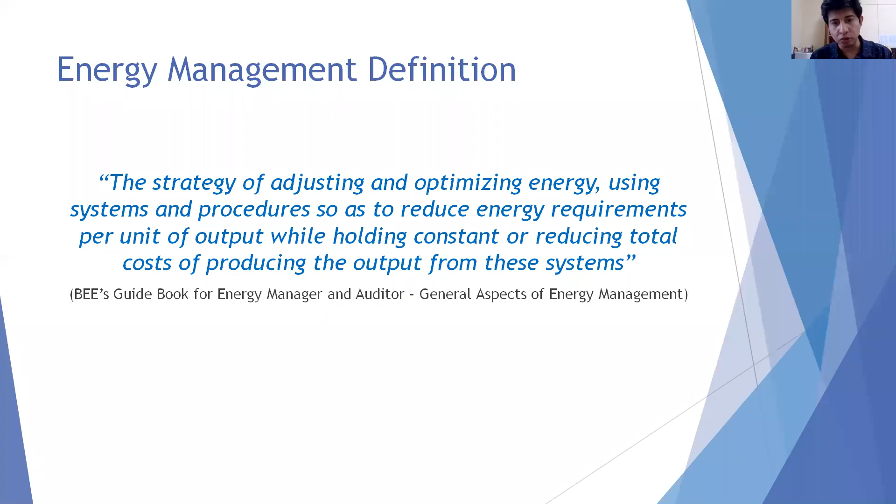As we move on to the next slide, the objective of energy management is to achieve and maintain optimum energy procurement and utilization throughout the organization. And ultimately we have to minimize energy cost without affecting the production and quality, to reduce energy wastage and to minimize the environmental effect by decreasing the CO2 emissions.

Now, why we need energy audit? Energy audit is a technique for addressing the energy management procedures. So basically, there are three key factors which play a major role in the overall production cost of any product or service. The three factors are energy, labor, and materials. And as we see in our industries, the major factor is energy, which claims around 30 to 50% of the overall production cost of the goods. So we target this area, that is energy management.

Our primary objective of energy audit is to determine ways to reduce energy consumption per unit of product output or to lower the operating cost. And energy audit provides us a benchmark for reducing the energy consumption in any industry.

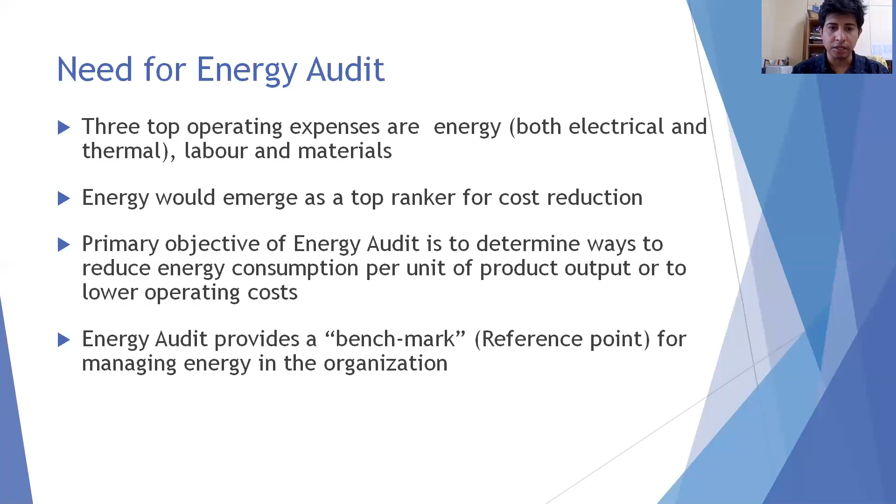Energy audit and its types. If we say what is energy audit, we can define energy audit as a verification, monitoring and analysis of use of energy, including the submission of technical reports containing the recommendations for improving energy efficiency with the cost benefit analysis and an action plan for the implementation of such recommendations in order to achieve energy efficiency in our industries or plants.

The type of energy audit to be performed depends on three factors: function and type of industry and the processes in that industry, depth to which final audit is needed, and potential magnitude of cost reduction desired. Thus, energy audit can be classified into the following types: preliminary audit, targeted energy audit, and detailed audit.

Preliminary energy audit is relatively a quick process and takes around 2 to 5 days or maybe a week, depending upon the procedure and size of the plant or industry, wherein we establish energy consumption in the organization and a scope of savings. After which we identify the most likely and the easiest areas for attention, which are directly targetable to take the actions for energy conservation, and we identify those areas for the improvements and set a reference point for saving the energy.

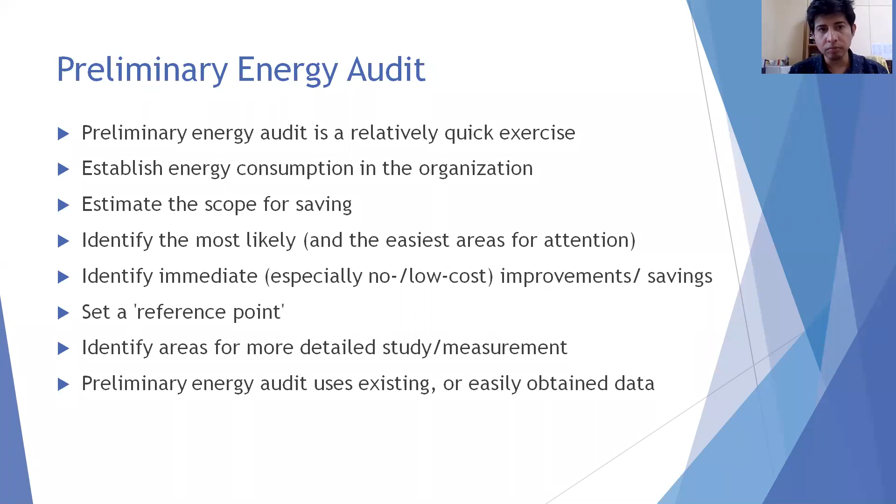Targeted energy audit. Targeted energy audit is basically an advanced part of preliminary energy audit, wherein we take the data and we do the detailed analysis on specified target projects. Like after the preliminary audit, some plant says that we only target the boiler portion, so we carry out the detailed energy study of the boiler part. Or if someone says that we only want to target the HVAC portion, so in targeted energy audit we only go by the specific zone-wise analysis of energy consumption.

Further, as an example, an organization may target its lighting system or a boiler system or a steam system or compressed air system, with a view of effecting energy savings. So targeted audits therefore involve detailed surveys of the target subject and analysis of energy flows and costs associated with the targets.

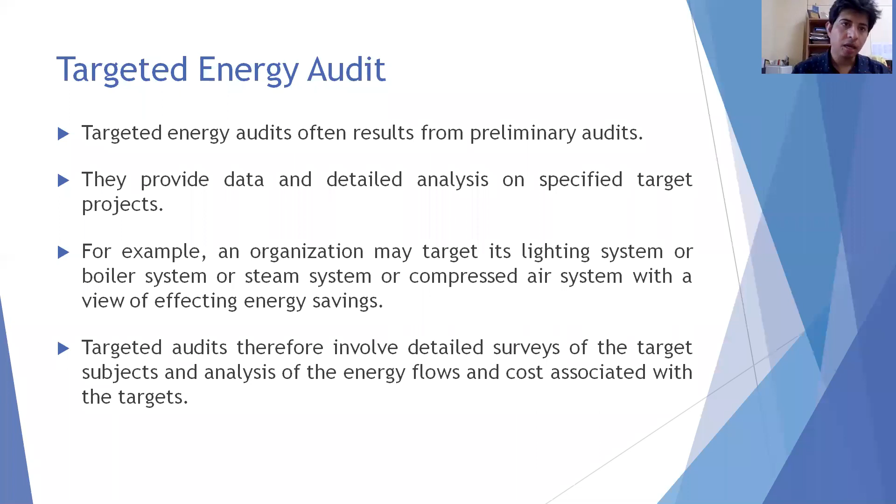Now the third type, which is the more exhaustive type of energy audit, wherein we carry out the detailed analysis and measurements ranging from a few weeks to a month, and we evaluate all major energy consuming systems and equipment, and offer the most accurate estimate of energy savings and cost. Here we do proper planning of all the manpower, and we select the instruments which are required to carry out the detailed energy audit, wherein we do measurements and take values, and then we further find out the scope for energy savings across all the zones of the plant.

While doing the detailed energy audit, we consider the interactive effects. Effect of one zone on another zone, or one process on another process. We also take that into account while calculating the energy savings or energy consumption in any equipment.

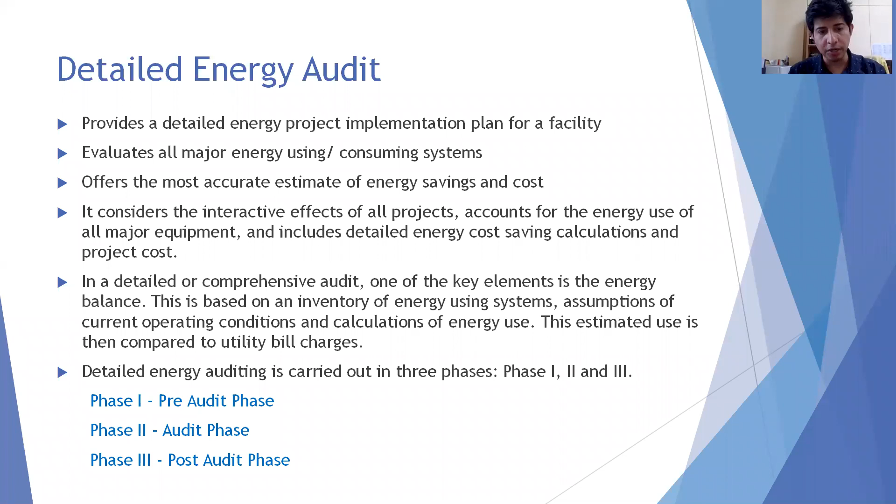The detailed energy audit is carried out in three phases: the pre-audit phase, the audit phase, and the post-audit phase. In the pre-audit phase, which is step one... Actually, there is a 10-step methodology to carry out the detailed energy audit. Step one and step two are related to the pre-audit phase.

In step one, we do the proper planning and organize things, wherein we make an energy audit team and choose the energy audit instruments which are required for carrying out the energy audit, and we plan for the number of days during which we carry out the energy audit in any industry.

And then we conduct a walkthrough audit, wherein we visit the plant for one or two days, discuss with the plant managers, shop floor people and top managers, collect the macro level data from them, go through the overall process of the factory, and become aware of the basic functionality of the processes carried out in the factory.

Then we plan for the next stage, that is, conducting a brief meeting and structured interview with all the divisional heads and persons concerned. In this stage, we prepare questionnaires to collect data from different divisions, zones or sub-processes running in the factory, and we build up cooperation for the whole period, since we need constant support from the management to carry out this energy audit.

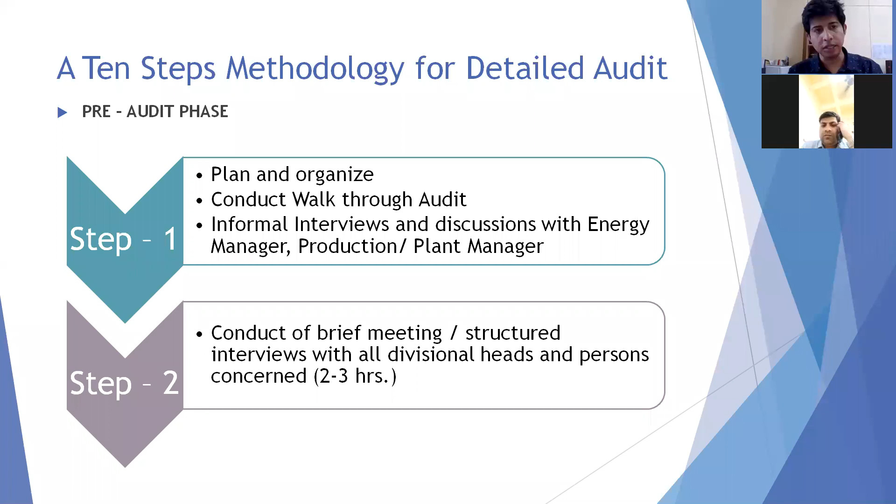The next stage starts with the third step, which is the audit phase, wherein we collect the primary data for each process, that is, the historical data and baseline parameters, and prepare a process flow chart for the whole facility. Then all service utility system diagrams are developed, such as the single line diagram, water distribution diagram, steam consumption diagram, and compressed air distribution diagram. Then we collect the design operating data along with the schedule of operations in the factory.

Along with this, we also collect electricity bills. Sometimes we collect the last one year of data, and if the process is too critical, we collect the last three years of energy bills, and the log sheets maintained in the plant.

In the fourth step, we conduct a detailed survey and measurements of all the equipment and sub-processes running in the facility. We use dedicated instruments such as a power analyzer, flue gas analyzer, tachometer, and anemometer, and for thermography, a thermography device. While carrying out detailed measurements, we do a motor survey, insulation survey and lighting survey. Along with that, we do detailed collection of various energy-affecting parameters.

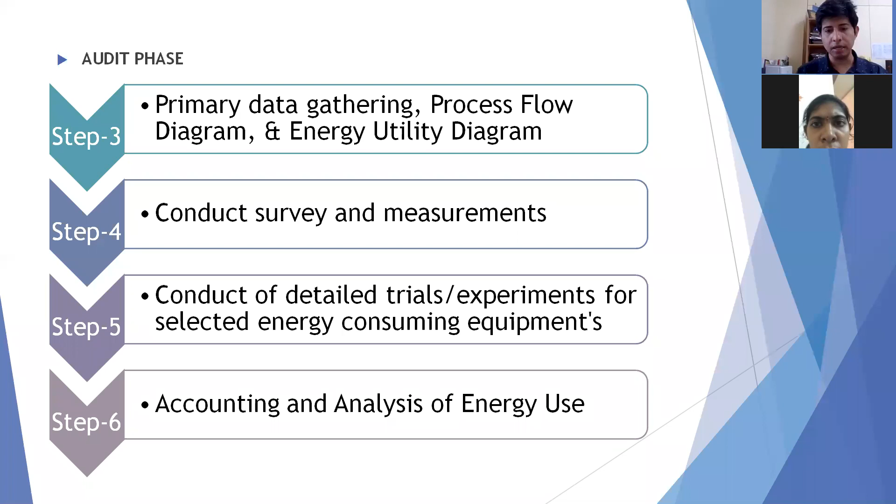After collecting detailed trial and energy-related data from each of these zones, we do total energy accounting, meaning how much energy is being consumed and what its share is compared to the total energy consumption of the plant. Then we do a detailed analysis of each energy-consuming zone. In the seventh step, we identify and develop energy conservation.

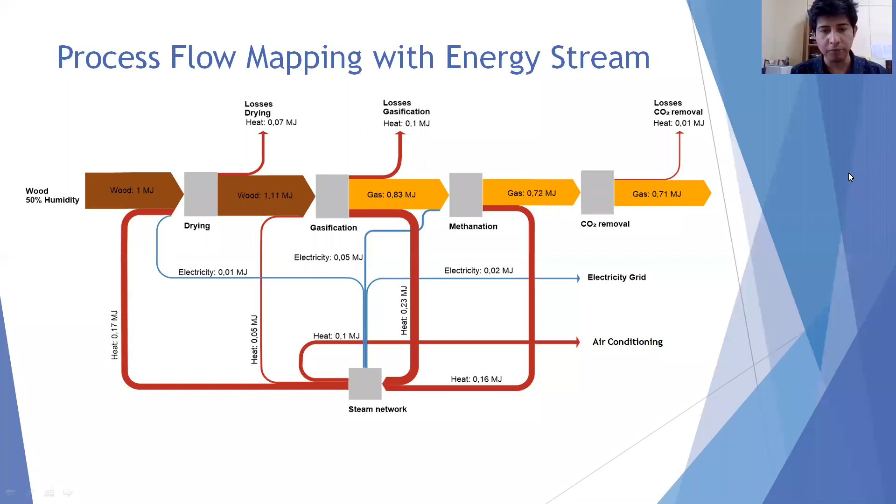The next stage is identification of energy conservation opportunities. These opportunities are basically divided into 4 areas: energy generation, energy distribution, energy usage in processes, and fuel substitution. Energy generation covers the areas wherein we look out for possibilities where we can generate energy from the existing system output, like captive power generation, steam generation in the boilers, thermic fluid heating, optimal loading of DG sets. These are a few areas where energy generation possibility can be looked out for.

And in energy distribution, we identify the possibilities of energy conservation in transformers and cables, transmission lines and switch gears. And power factor improvement can also be another aspect of energy conservation in energy distribution.

And the third point is energy usage in processes. We try to analyze the process, whether we can do some process modification, or is there any opportunity in modifying the technology or equipment, so that the process consumes less energy and produces the same quality of output. This aspect we have to check in this area.

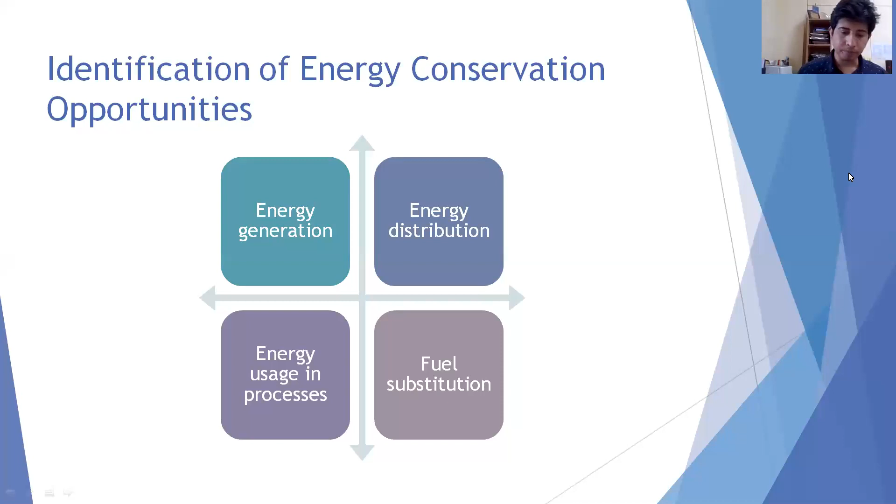Next is technical and economic feasibility of the chosen energy conservation options. There are a few factors which need to be taken into consideration while selecting any energy conservation option. Like technology availability, where we have to check whether the technology is easily available, or it has to be procured within the country, or from outside the country, or whether it is locally available. That is one factor.

The second one is the space requirement. We have to check how much space is required. It may happen that we do not have much space in the plant area or in the facility to put up that technology. If the space is not there, then the implementation of such ENCON measures will be either costly, or it may not be feasible. Costly means they have to take the space on grant, or there may not be a possibility of taking that space. So in that case, the ENCON measures implementation may not be a feasible idea, even though it may result in huge energy savings.

The third factor is skilled manpower. We have to keep in mind that we have the trained manpower who will be managing or operating this technology which we have taken in the ENCON measures. And the fourth factor is after-sales service. We have to check whether local service providers are there who will be available throughout the time. If any fault occurs in that technology, the vendor who is supplying the technology, if locally available, will be available for addressing that problem.

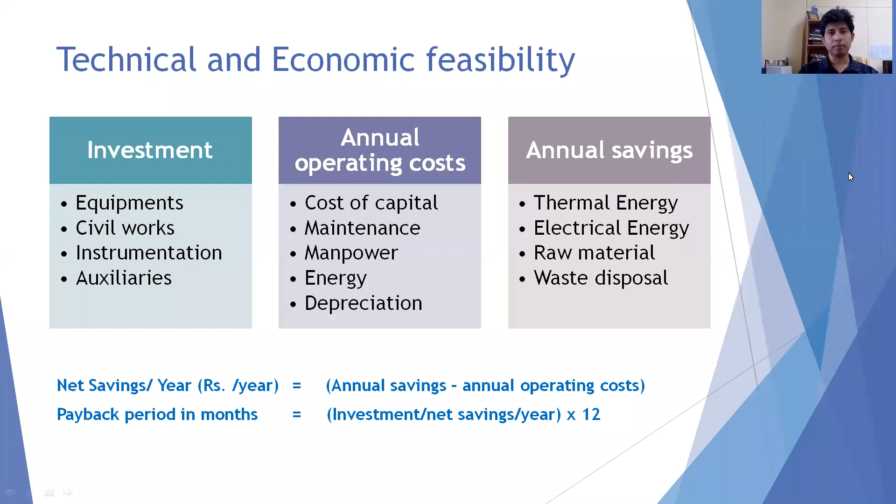So payback period will be the time after which the savings will be the profit of the facility as a parameter of energy savings. After covering all these activities, we have to now prepare the energy audit report.

A typical format for the energy audit report that most energy auditors use is comprised of this format. There will be a table of contents, the acknowledgement, and the energy audit team. We have to mention the people who have carried out the energy audit in the facility, and the executive summary of the energy savings or the ENCON options, which will briefly detail each of the ENCON options, investment requirement, savings, and the payback period.

Then the first chapter, from which the main report starts, is the introduction about the plant, which will cover the general plant details and description, component of production cost, which will cover the raw material, energy, chemicals, manpower, and overhead cost, along with the major energy use areas. Production process description will cover the brief description of manufacturing process, process flow diagram, major unit operations, major raw material input, quantity, and cost.

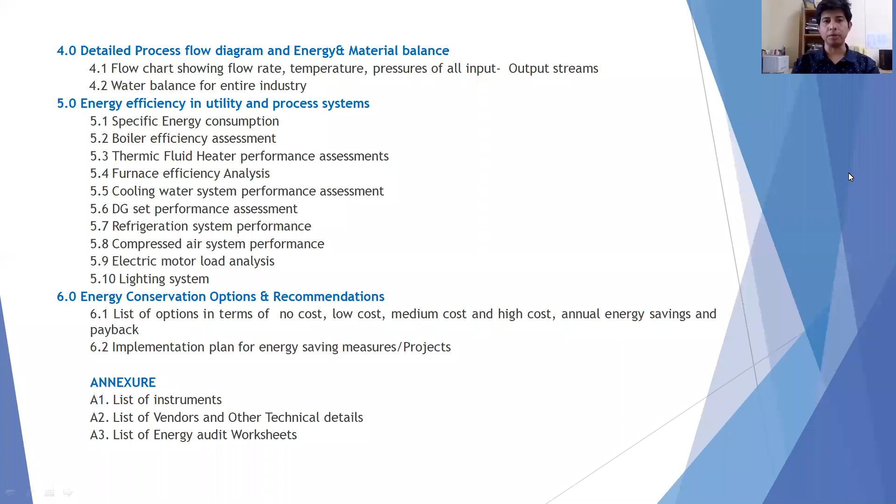Now for prioritizing the various ENCON options, we use this kind of format wherein we divide all these ENCON measures in three portions: no investment, low investment, or high investment. No investment measures are those where we do not require any investment. We just have to do some changes in the process or some equipment tuning or energy supply tuning, and we can directly save the energy. The low investment options are those where the payback will be from 2 or 6 months up till 1 year, and require very low investment. Such measures will be like controls, equipment modification, process changes.

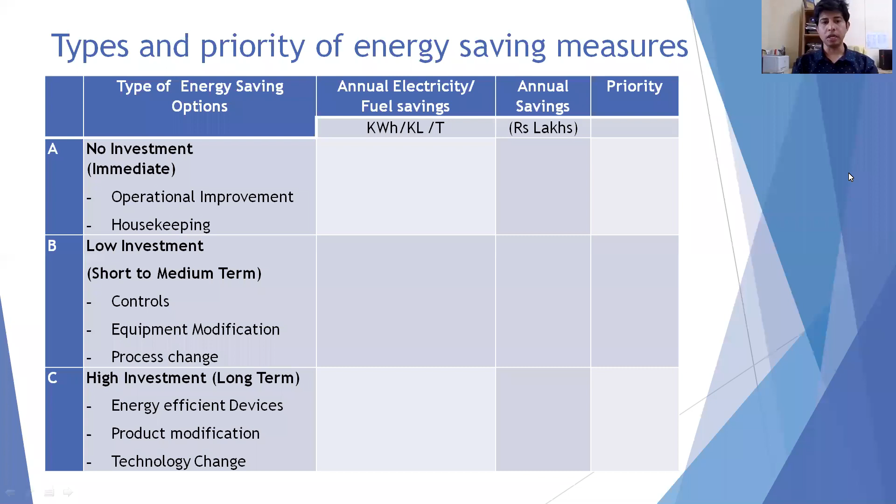The format for reporting energy efficiency measures in the reports will be this kind of. First row will give you the title of the energy saving recommendation, such as replacing an old non-pressure boiler with an energy efficient IBR boiler. The next row will briefly describe the existing system and operation. After which we describe the proposed system and operation as part of the ENCON, or energy conservation, measure, and then we have to do a detailed energy saving calculation in this format itself, and give the cost benefit analysis and payback period in months or years.

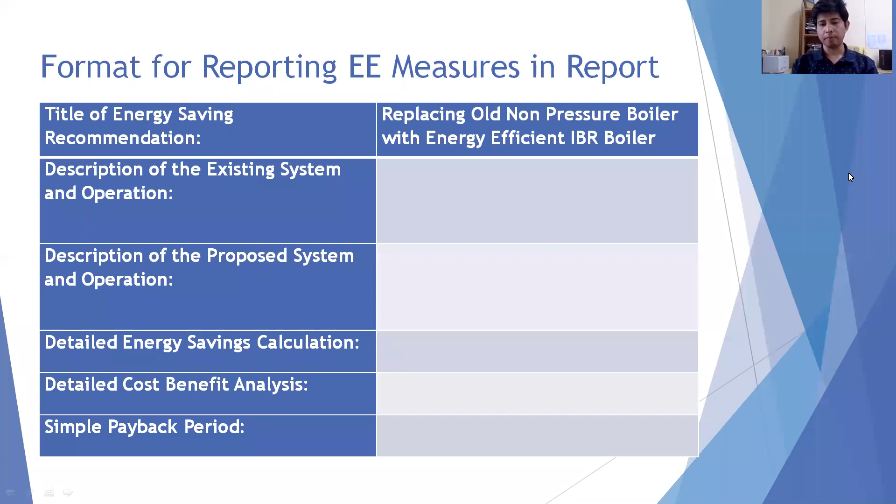Now, understanding energy cost. Energy invoices and bills are generally used for estimating the energy cost for any facility. Basically, they provide a record of energy purchase in a given year, which gives a baseline for future reference. So the energy invoice may indicate potential for savings when related to production requirements, or to air conditioning requirements, space heating, etc.

When electricity is purchased on the basis of maximum demand tariff, we can check what our maximum demand is, what is shown in the electricity bill, and what is the actual maximum demand being consumed in the unit. So we can check the difference. If there's a big difference, we can cut down that maximum demand requirement and save a big chunk of money on the electricity bills. Such measures we can generally identify directly by reviewing our electricity bills or energy invoices.

This does not require an investment, so these are quick payback opportunities which we should surely look for. Then, the energy cost in an industry.

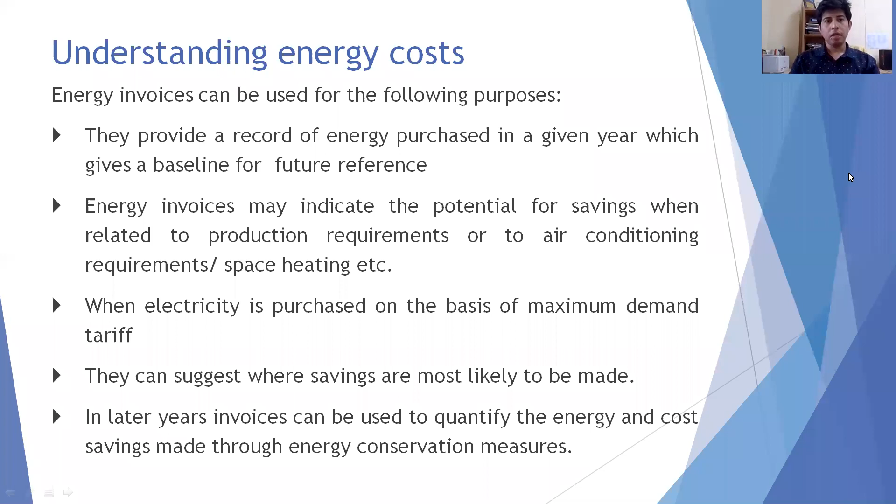There are two types of cost: fuel cost and power cost. Fuel cost comprises fuel oil, low sulfur heavy stock oil, light diesel oil (LDO), and LPG. These thermal energy sources we cover under fuel cost, and the procurement of such fuels generally depends on 4 or 5 parameters: price at source, transportation charges, type of transport used to procure or transfer these fuels to the industry, and the quality of fuel such as contamination, moisture, and GCV of the fuel. So these factors we should keep in mind while selecting fuel, or the thermal energy source, for the industry.

As far as power cost is concerned, electricity prices in India vary from one state to another. So we have to keep in mind all the tariff orders, and be aware of how much charges they are basically charging for the various tariff structures - like the unit cost, demand charges, PF charges, or any penalty if we are not complying with the PF requirement, which is generally 0.95 in most states. And is there any LT or HT - low tension or high tension - charges? So we should look for all these factors while analyzing the electricity bills or power cost.

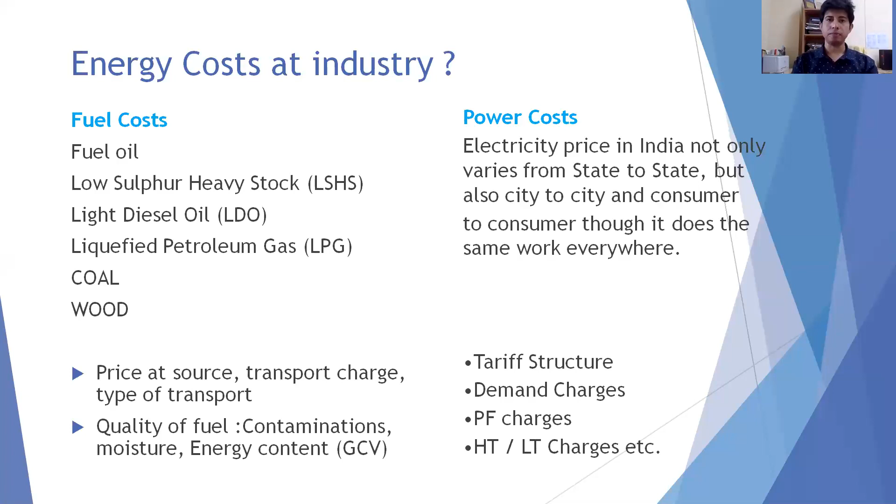Understanding the energy cost, generally from the energy bills, the energy cost is calculated like this: for electricity, the consumption was around 5 lakh kWh units, and the unit cost was 4 rupees per unit, so the total monthly bill was around 20 lakh rupees. For fuel oil, 200 kiloliters were consumed, and the unit cost of fuel oil was 10,000 rupees per kiloliter, so the monthly bill was around 20 lakh. Similarly, for coal, 1,000 tons were consumed, and the unit cost was 2,000 rupees per ton, so the total monthly bill was around 20 lakh. So the total cost of energy for the whole month was around 60 lakhs.

The conversion to a common unit of electric energy: these are the common conversions - 1 kWh equals 860 kilocalories per kWh. Heavy fuel generally has 10,000 kilocalories of GCV, and coal generally has 4,000 kilocalories of energy content per kg.

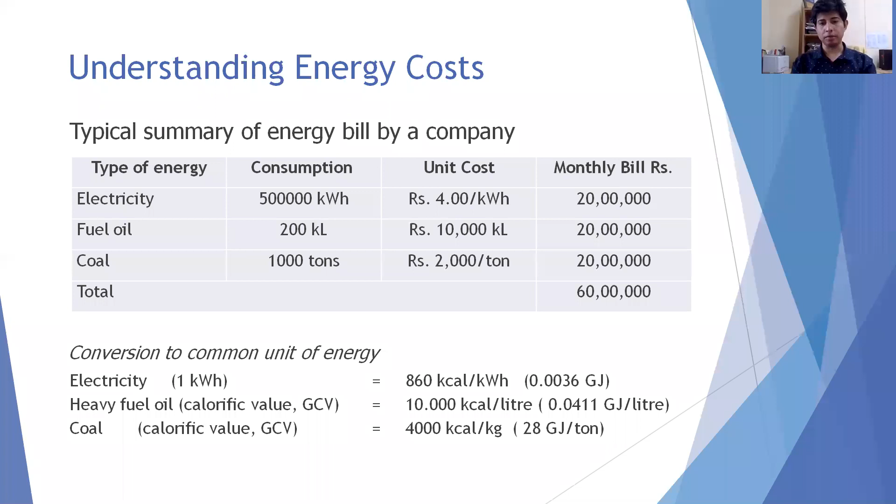Now, sometimes we do energy benchmarking. Not sometimes, always we have to do energy benchmarking while targeting energy conservation in a facility. Energy benchmarking is basically when we compare the per unit electricity consumption or energy consumption with respect to various other values.

So there are two kinds of benchmarking: internal benchmarking, where we compare our energy cost per unit of production with respect to similar values in the past, or when we compare the same with historical trends. Internal benchmarking is generally done with our own data, internal to the organization.

As far as external benchmarking is concerned, we compare the specific energy consumption or per unit energy consumption with respect to other industries operating at par, or operating on the best parameters in a similar sector. So there are various factors which can affect external benchmarking.

These include similar industries, the scale of operation, the vintage or how old the technology is, raw material specification and quality of raw material used, and production specification and quality. These are the factors we have to keep in mind while doing external benchmarking for energy conservation.

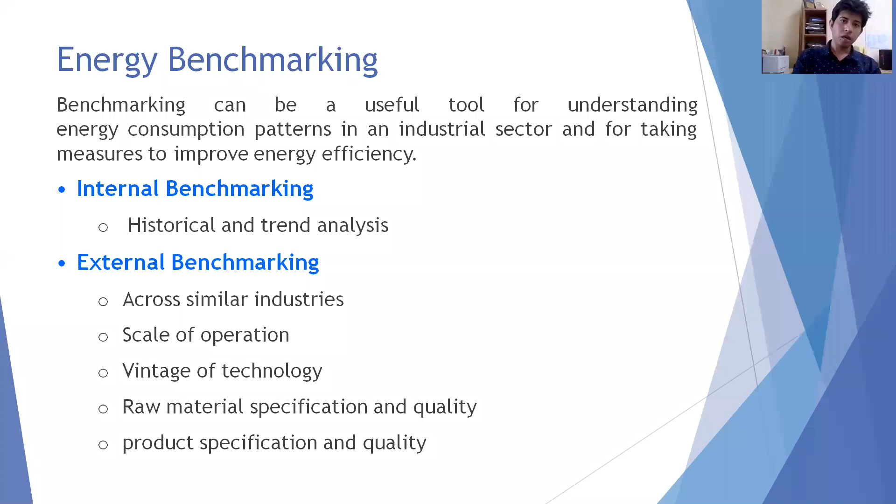Benchmarking energy performance permits quantification of fixed and variable energy consumption trends vis-a-vis production levels, and comparison of industry energy performance with respect to various production levels or capacity utilizations in another similar facility.

Identification of best practices based on external benchmarking data, and identification of the scope and margin available for energy consumption and cost reduction. This also forms the basis for monitoring and target setting. So these are basically the benefits which we can look for while doing benchmarking.

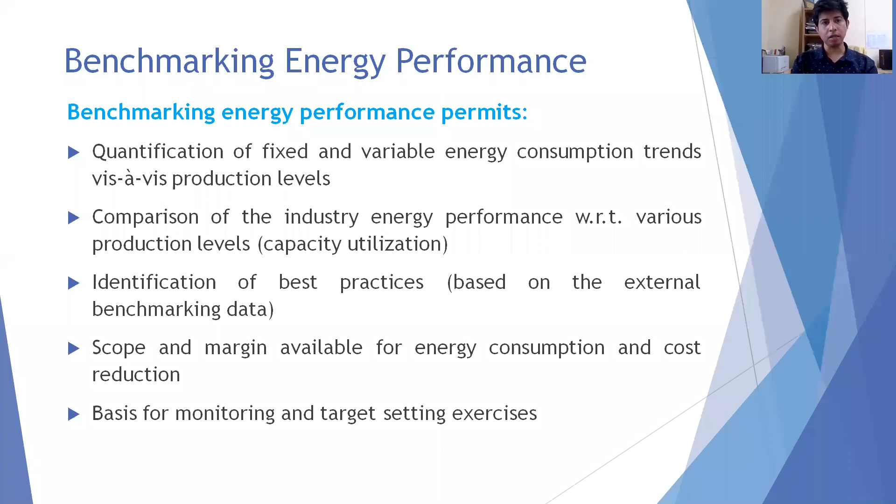Some of the benchmarking parameters which we generally calculate while doing benchmarking: there are two types, gross production related parameters and equipment or utility related parameters. Gross production related parameters are generally kilowatt-hour per metric ton of clinker in a cement plant, or kilowatt-hour per metric ton of production in a paper unit.

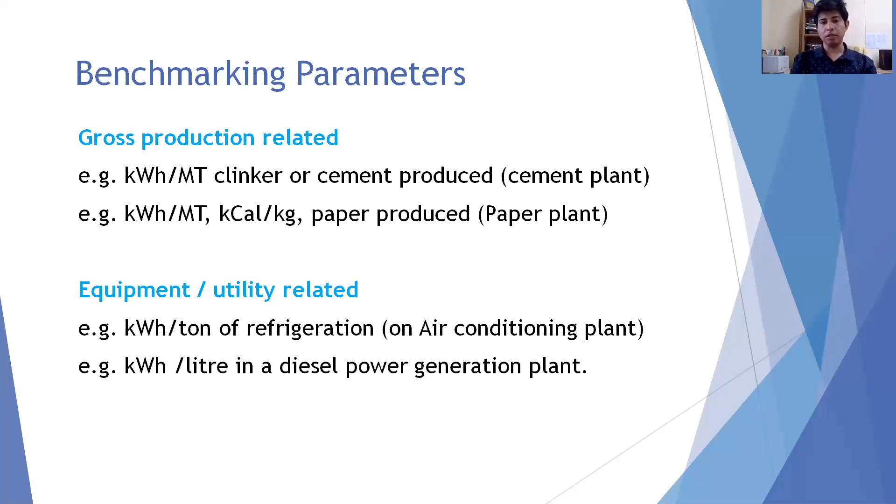For equipment or utility related parameters, we use kilowatt-hour per ton of refrigeration in an air conditioning plant, or kilowatt-hour per liter in a diesel power generation plant. These are the factors we calculate while assessing the energy performance of any facility.

The production factor is calculated by dividing the current year production with respect to the reference year production. The reference year equivalent is basically the reference year energy use multiplied with the production factor. So the plant energy performance can be calculated as reference year equivalent minus the current year energy consumed, divided by the reference year equivalent.

This will give you the plant energy performance. And if this value is negative, that means our current year energy consumption is more with respect to the reference year, which gives us an idea that we are consuming more, so we have to conserve energy.

And if the plant energy performance value is positive, that means in the current year we are consuming less energy as compared to the reference year. So somewhere we have taken some measures to conserve energy.

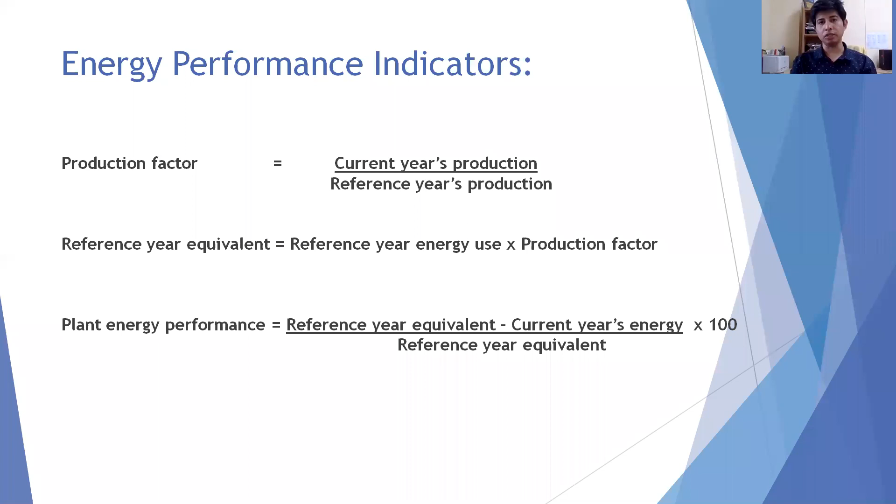Matching energy usage to the requirements: there are some scopes which we should look for in conservation of energy, such as eliminating throttling of pumps by impeller trimming, resizing pumps, and installing variable speed drives to give us energy savings.

Eliminate damper operation in fans by impeller trimming, installing variable speed drives, pulley diameter modification for belt drives, and fan resizing for better efficiency.

Moderation of chilled water temperature for process chilling needs, recovery of energy loss in control valve pressure drop by back pressure turbine operation, and adoption of task lighting in place of less effective area lighting. These are some of the areas which we can target for energy conservation.

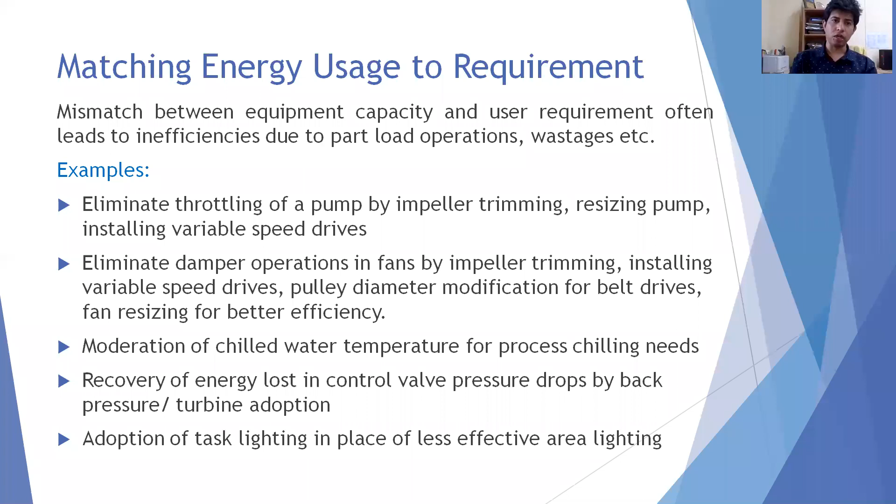Now, for maximizing system efficiency, we can replace pumps, fans, and air compressors with energy efficient ones to achieve energy savings.

We can eliminate steam leakages by trap improvement and maximize condensate recovery, and adopt combustion control for maximizing combustion efficiency. These are some of the ENCON options wherein we can improve system efficiency.

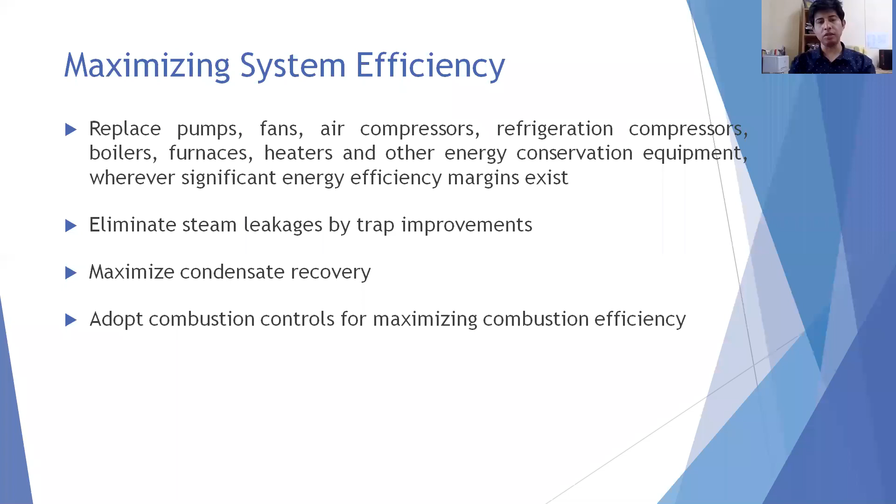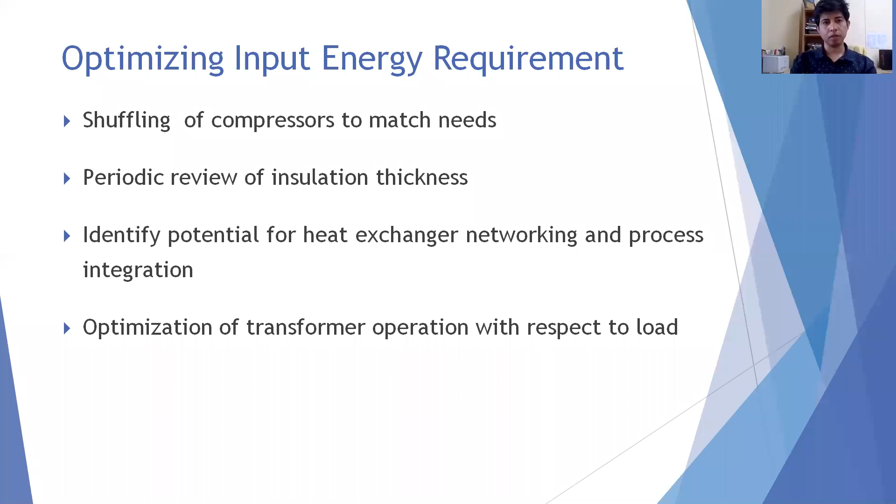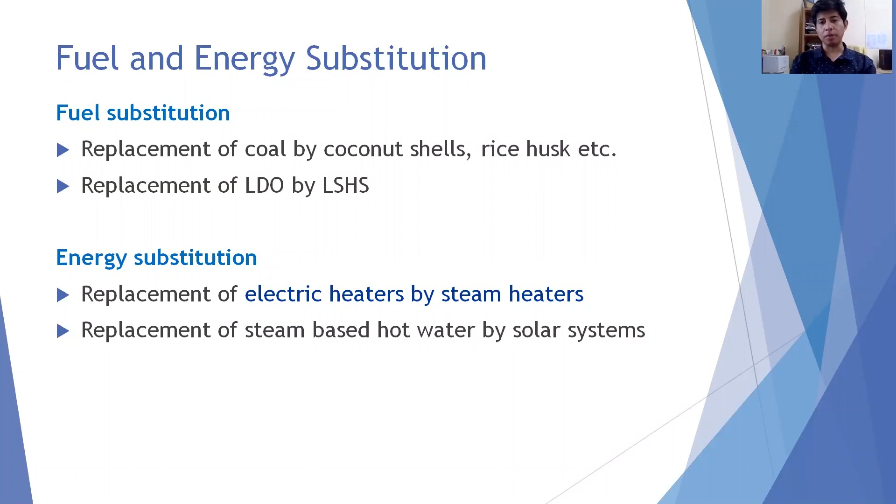The final part is our energy audit instruments. In order to do a detailed assessment of each technology or process zone in a facility, we have to use a dedicated energy audit instrument for collecting the detailed energy parameters.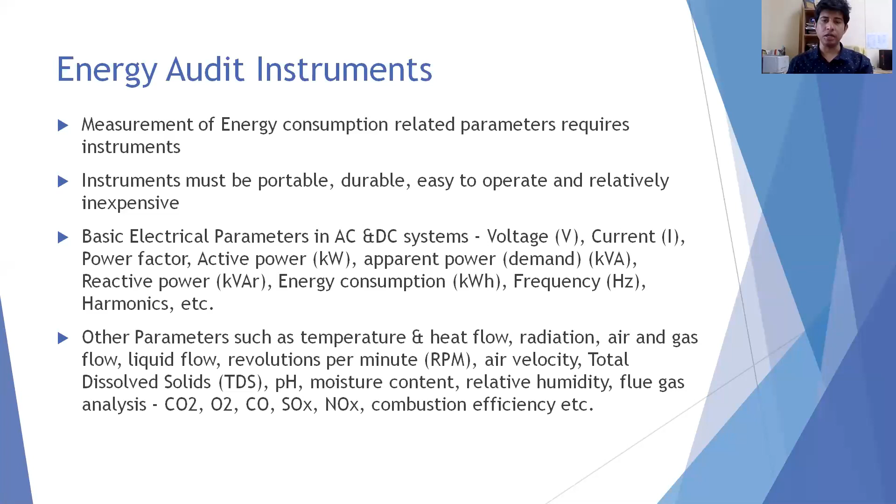The list of equipment is basically for taking detailed electrical energy consumption parameters. We use a three-phase power analyzer for equipment which runs on three-phase supply, and a single-phase power analyzer, generally used for lighting and fans or other loads which run on single-phase supply. Then the contact thermometer.

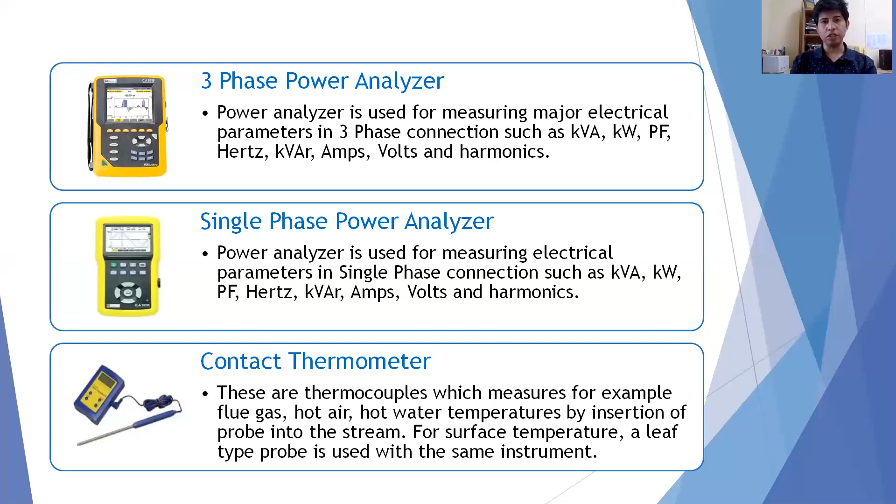This is equipped with a thermocouple which is used to measure temperature. The infrared thermometer is generally used to measure the temperature of surface areas of insulation or the outside surface of furnaces, boilers, etc.

Pitot tube manometer is used to measure flow. This is basically a contact type manometer which is used to measure the flow of any fluid.

Ultrasonic water flow meter is non-contact type. Basically, it is connected outside the surface of the pipe which is carrying the fluid.